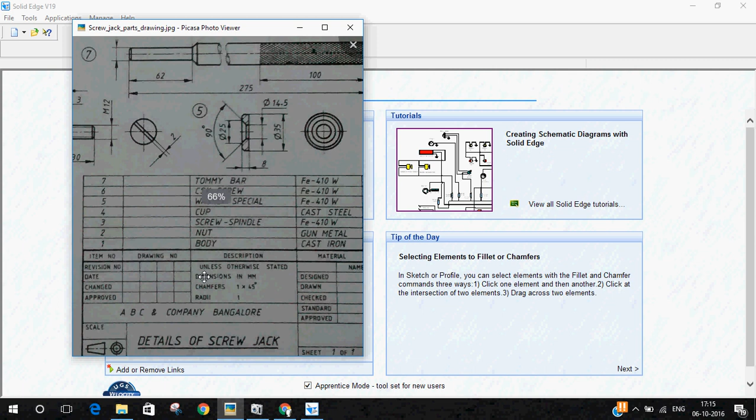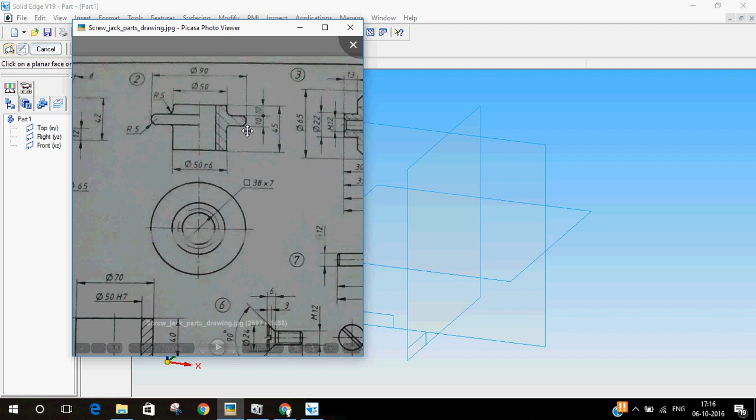So here is the drawing of the nut. We'll go to solid edge, solid part, then we'll start with the sketch. As you can see, this part also should be done using the revolve protrusion option. So we'll select the sketch, click on this front plane.

Now I'll start by drawing the cross section of this part. As you can see, this has a hole in the middle with square threads of 38 dia and 7 pitch. This can be done later using the threaded hole option. So now we'll just do the body without the hole in between.

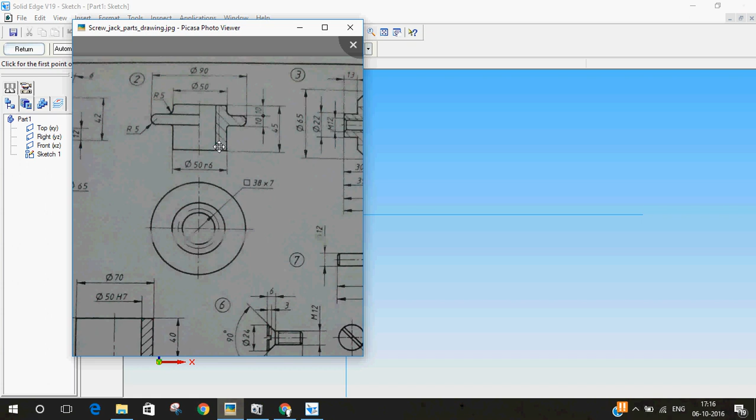So now we'll do this part in our sketch. I'll start now, just click here. I'm just doing the basic part without any dimensioning. Keep the base of the part on the axis, it will help you later while assembly.

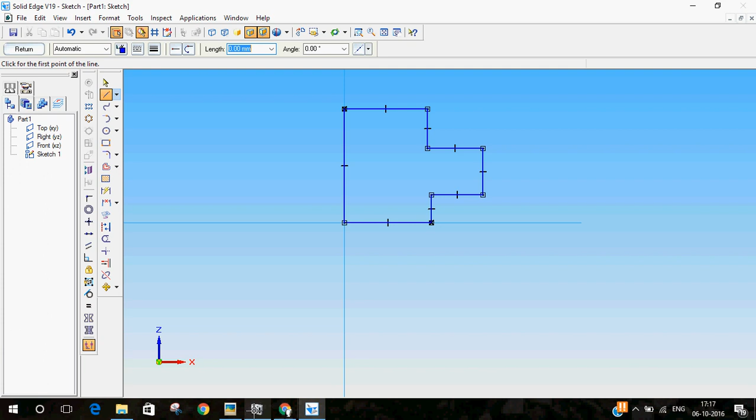Okay, now we'll start with the dimensioning. The overall height of it is 45, I'll do that first. I'll do this as 45. You see it moved up.

Now we'll do the next things. From top till this edge is 10 and this thickness is 10, I'll do that. Select the top edge, the edge, this edge, and this should be 10 and thickness of this is also 10.

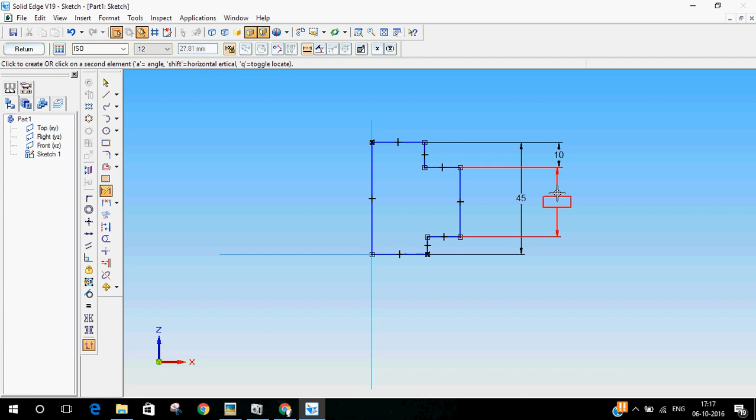So we are getting to the basic shape of the nut. The next thing is the bottom, the dia is 50, the top is also 50. I'll select smart dimension. I'll make this 50 by 2 as this is half of it. Sorry, it should be 50 by 2. Okay, so we have 25 there.

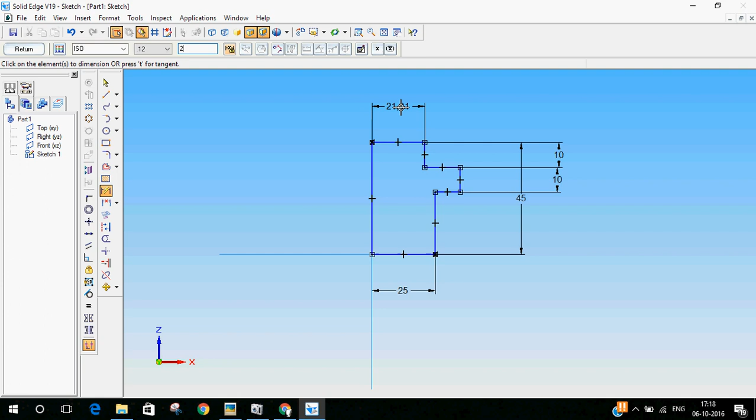And this also I'll make it 25 directly. Okay, so we'll see what else is left there. So we are done the 50, we are done 10, 10, 45 is done, this 50 has been done. The next part left is, okay, it's here.

This overall end to end should be 90. So what I'll do here is 90 by 2, that should be 45. I'll do 90 by 2. Okay, this is done. Now as you can see, they mentioned it here.

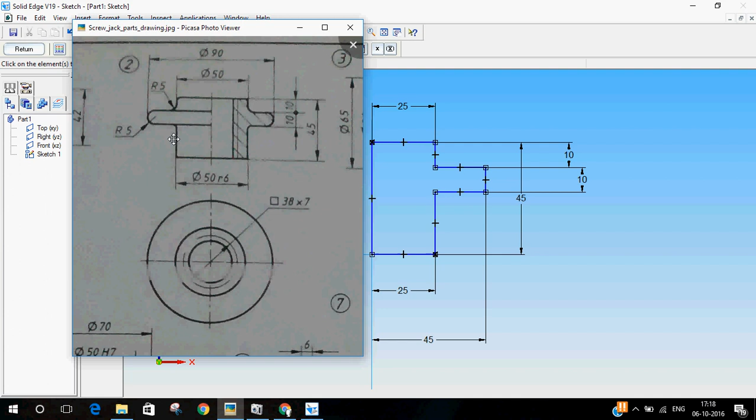This radius is 5 and this is also 5. That means that this also should be 5. All these fillets are 5.

Now I'll select the fillet option. I'll select the radius to be 5. Then I'll select this edge, this edge, this edge. Okay, it did not come out. I don't know why, we'll see again. I'll select fillet, I'll select 5, let me select this edge.

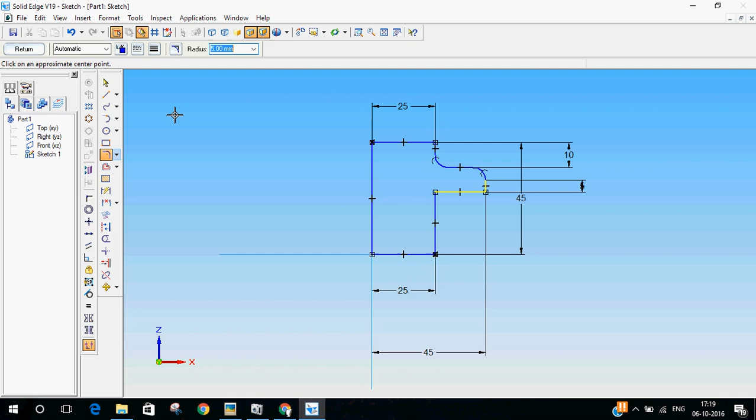Okay, it's not working. I'll show you another method to do that. I'll select this now. It should be 5. Okay, we'll try this again. We'll see whether this works. And select. Okay, it came now.

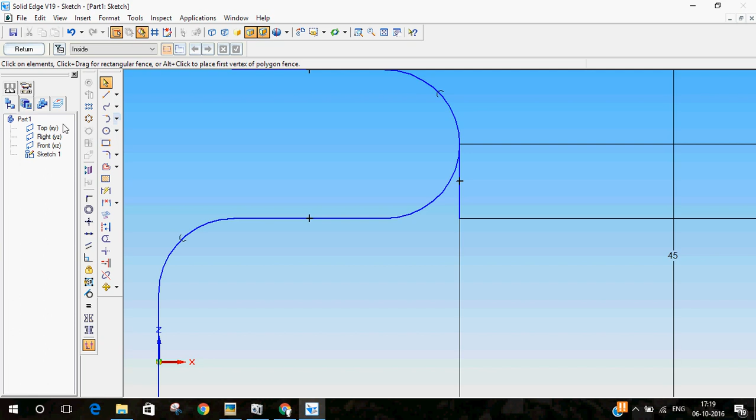Oh, there's a small part remaining. I'll just trim it out. Okay, trim. So now we have the basic sketch of the screw jack.

We'll verify it again with our sketch. This should be 50, that is 25. This should be 90. Okay, that has gone now since we did the fillet option. I'll do it again.

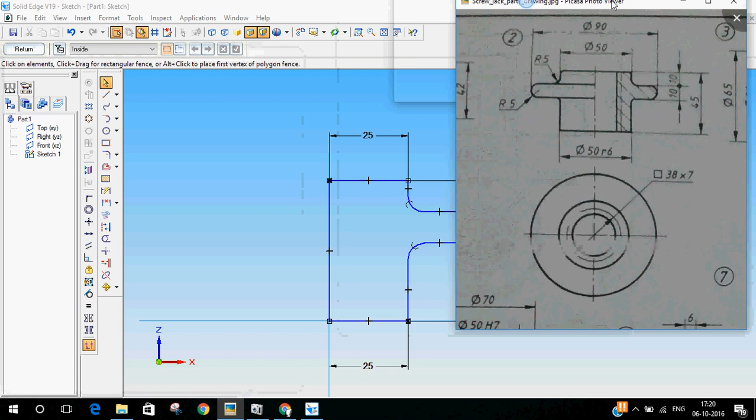I'll just mark the dimension. So from the center to this edge will be 45. Nothing to worry, okay, it's 45 there. 90 by 2. And these two should be 10.

Okay, we have it, the second one is missing. I'll just put it back there. So it is 10 now.

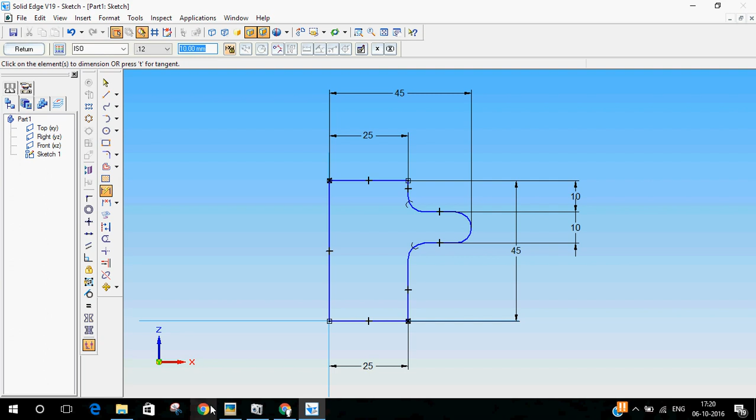And this height should be 45. It is there. This should be 50, that means this is 25. And these radii are 5. So I'll return from the sketch.

Select revolve protrusion. Remember, this option should be select from sketch. It shows here what should be done next, it says click on a sketch chain. So I'll just select the sketch which should be revolved.

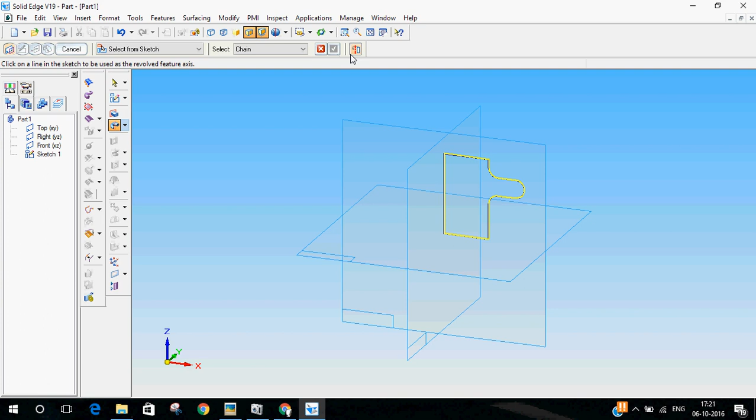Now as you can see, I have not created a separate axis for this since this line is already on the axis. In the select axis option, I'll select this edge only. So now you can see it's coming. I'll do it 360 degrees, enter.

So now you have to click. It's done, I'll click on finish. I'll hide the sketch. Okay, we have the basic shape of the nut now.

Now what we have to do is create this threaded hole in between with 38. This indicates that it's square thread, you can see the small square here. Square thread with 38 dia and 7 mm pitch.

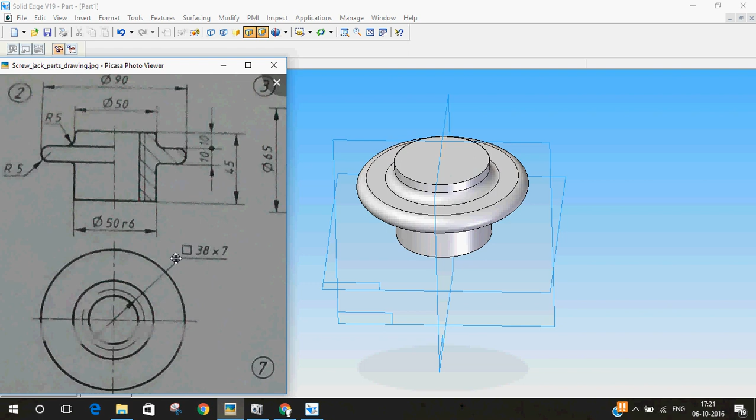Now I'll show you how that can be done. Now what we have to do is select the hole option, and now you have to click here which says hole options. Okay, now we got this dialog box which popped up. Here in the type you can select threaded type, and this unit should be in mm.

This is standard thread, thread they have given here. I cannot find square thread in these options, so I'll just take the trapezoidal thread which is almost same as the square thread. It's 38 cross 7. I'll scroll down to TR, which means trapezoidal thread. So I'll select 38 cross 7, TR 38 cross 7.

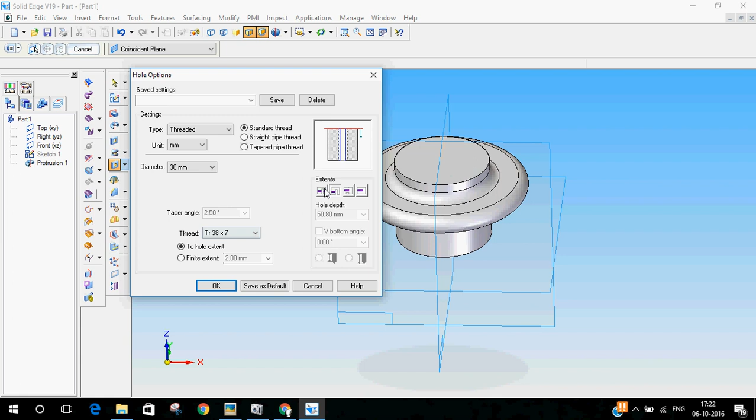Now you can see this diameter will automatically change to 38 mm. Now the hole thread extent should be fully to the hole, so I'll click on hole extent. Okay, nothing to worry about this side, I'll show that in the later video.

Okay, click on OK. Now it's asking you to select a planar face or a plane on which the hole should be done. So I'll select the top plane of this nut. On that, see, you can see this threaded hole has come. I'll just place it and then it's done.

Right click to release or select option. So now I've placed it exactly in the center. Click on return.

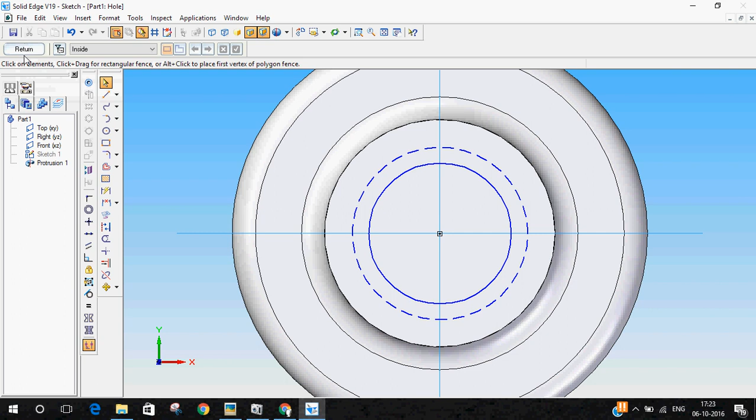Now it's asking the side to be cut. On top you can see this exclamatory mark because there's nothing to cut on top. So you have to select the bottom and then click anywhere and then click on finish.

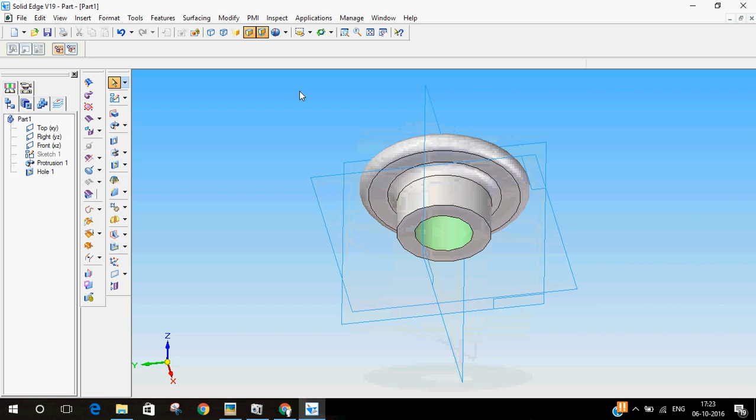Now as you can see, you have got a hole. The green color represents that it has been threaded. So this has been threaded with a square thread of 38 dia and 7 mm pitch, but you cannot see it here. You can see it in the drawing, assembly drawing.

Okay, so now this part is ready. I'll save it. I'll save it as part number 2, that is nut.